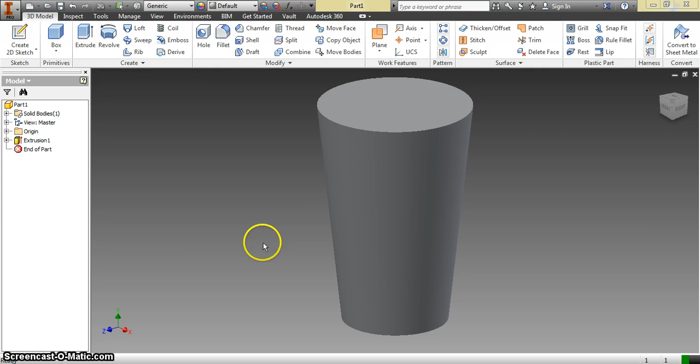This video is going to show you how to use work planes to create sketches on different surfaces. So we already made our cup using our extrusion, but we don't want to use this anymore because now I want the bottom of my cup to be a square and I want the top of my cup to be a circle, and we can't just do a simple extrusion for that.

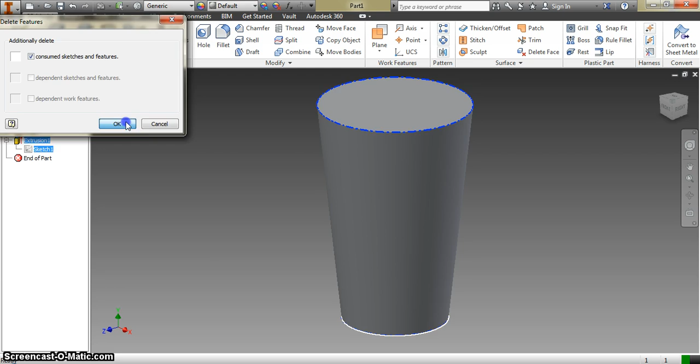So I'm going to right click on my extrusion and do delete. And when this box comes up that asks me if I want to additionally delete all the sketches that created that extrusion, which would be my circle on the bottom, do I want to delete that also? And I'm going to click OK. If I didn't want to delete that sketch, I would just have to uncheck that box.

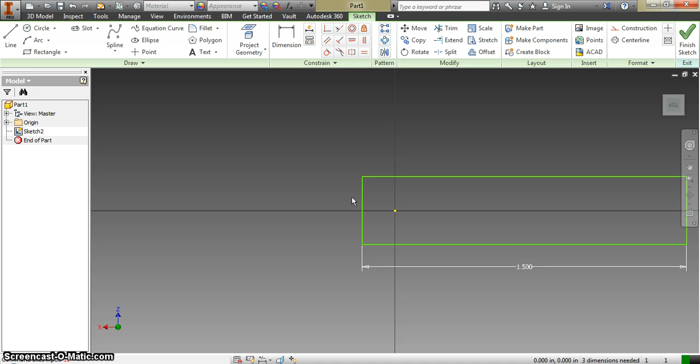So what I'm going to do is create my sketch for my square, which is the bottom of my cup. And I'm going to say that I want each of those sides of my square to be 1.5 inches. So here's my base of my square.

We know that we need the base of my square to be centered around the axis point, and it clearly isn't at this point. So we can use some constraints to make sure that our square is centered. This dot is in the center of our square. So we can use our horizontal constraint to line up this point.

And what else do we want horizontally on this line with this point? We want the center of my line over here. And I know I get the center when I get that green dot. And as you can see, my square is now in the center, lined up on this horizontal axis, which is my x-axis.

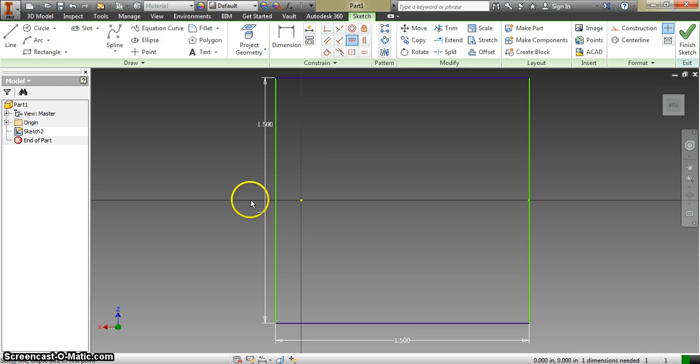Now I also want my dot to line up with my z-axis, so I'm going to take my vertical constraint and I'm going to click that same point, and now I want that to line up with the center of this line. Now we can see that all of my lines are blue, which means they're fixed in place. If I try to drag one, I can't, it won't move.

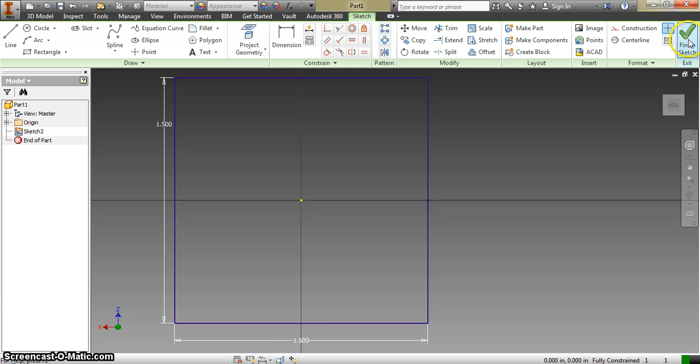If any of your lines are still green, then you have not fully constrained your sketch. We want this point right in the middle of our entire square. So we're going to finish that sketch. Then we want to now think about the fact that we want the top of our cup to be a circle, and we want the top of our cup to be somewhere up here.

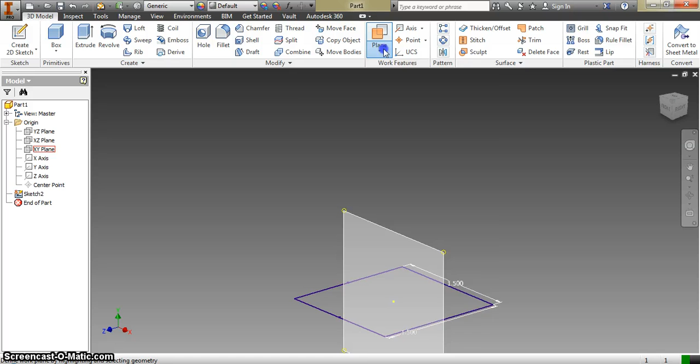How can I make a sketch above this sketch? I use my work planes. So I'm going to create a plane here. I can make a plane on any of these initial planes if I wanted to choose another one that I didn't choose first. But I don't want just one of those planes. I want a plane that's above this plane that I already created.

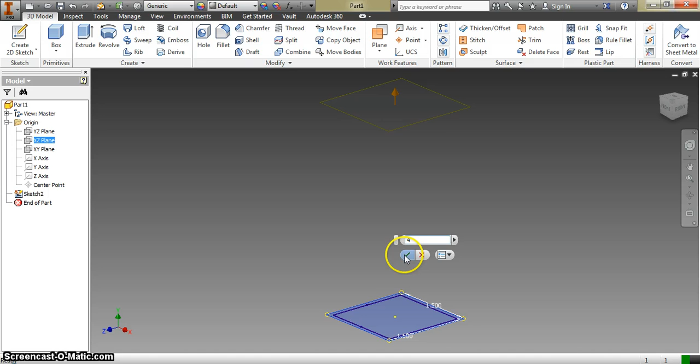So I'm going to click on this plane in my origin folder on the left in my browser, and I can see it's asking me how many inches above do I want it. I'm going to say 4 because I want my cup to be 4 inches tall. I'm going to click check, and now I have my work plane that I can create a sketch on above my square, which I'm going to show you how to do in the next video.